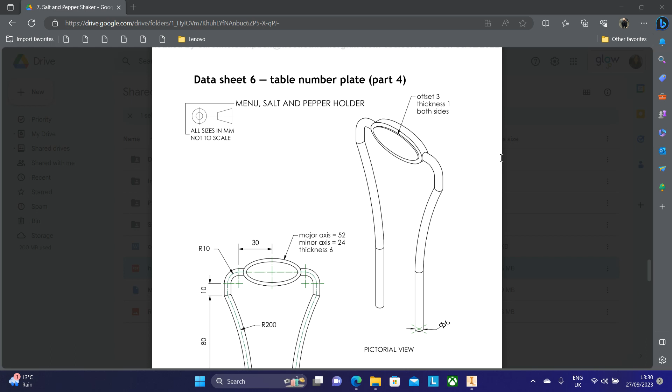So the number plate has this ellipse at the centre, and then we have these two paths running either side, which we will create by creating a profile and then creating a path and using sweep along a path. But we're going to start off with this ellipse in the middle.

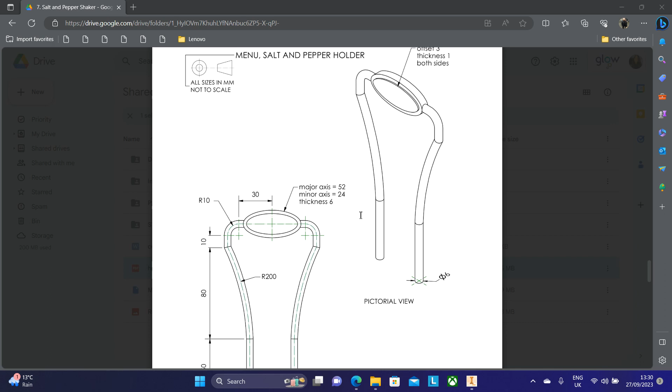So we can see that it has a major axis of 52 and a minor axis of 24, and then it has a thickness of 6. And then there is an offset of 3, which has a thickness of 1, and that is repeated on both sides. So the first thing we're going to do is open up Inventor, and we're going to make sure that we have a standard millimeter part.

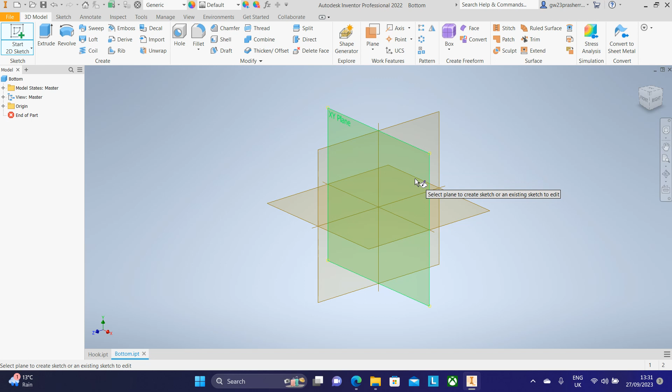We want to click Start a 2D Sketch, and we want to select the XY plane. Now under the circle category, we're going to press Ellipse, and we're going to start the ellipse off in the centre of our two axes on the green dot. We're just going to click to the side and above. Don't worry about the sizes just now.

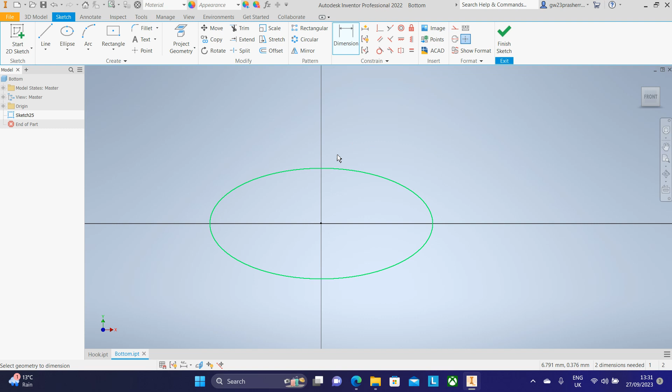Now we're going to use the dimension tool to dimension our ellipse. So I'm going to click the outside of my ellipse and I'm going to click above it and make sure that size is 26. And then I'm going to click the outside of my ellipse again, but this time select it to the right hand side, and I'm going to make that size 12.

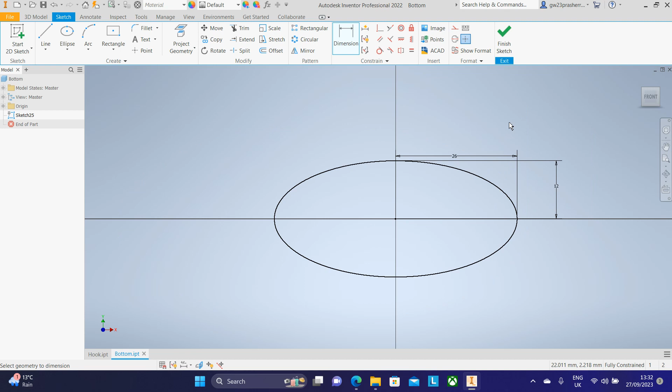Once I'm done, I'm going to finish the sketch and I'm going to extrude it by 6, like so.

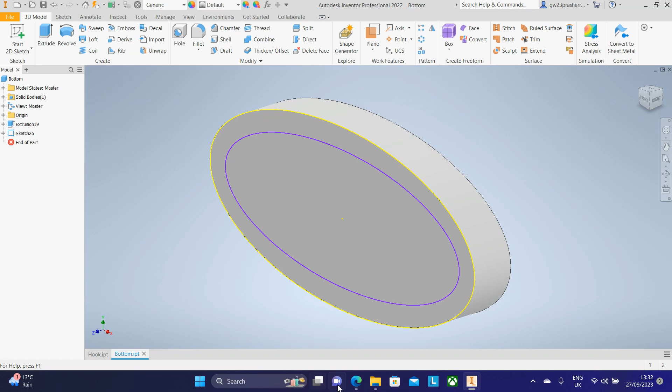Now we're going to do the kind of smaller ellipse in the middle. So I'm going to start a 2D sketch on one of the surfaces, and I'm going to project the geometry of the ellipse that I've already made. I'm then going to offset that by the 3 that it said on the pictorial view. So I'm going to offset it by 3 and press enter and then finish the sketch. And then I'm going to extrude that by 1. So click extrude and change the size to 1.

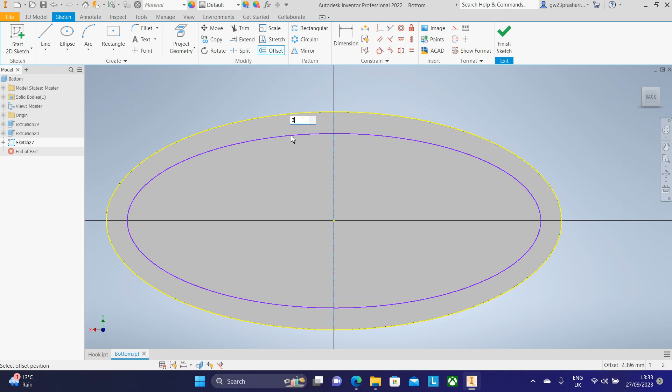And then I'm going to do the exact same on the back. So start a 2D sketch on the back, project the geometry of the ellipse, click offset, click the ellipse and change it to 3, and then finish the sketch and extrude it by 1.

So now we have our ellipse, and we're going to now start creating the sweep that is on either side of the ellipse. So the first thing we are going to do is to create the path.

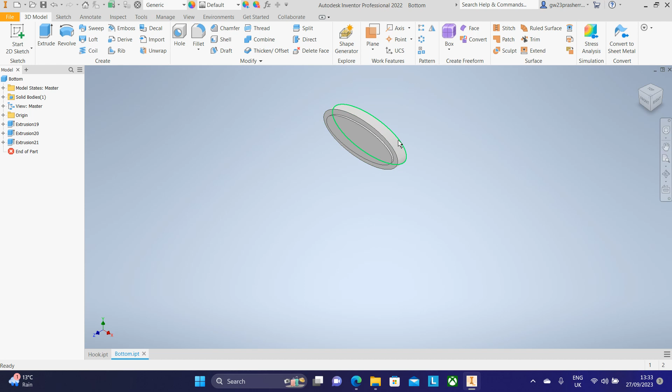So we're going to find a plane that runs down the middle of these ellipses. I'm going to go to the plane menu and I'm going to select the mid plane between two planes, and I'm going to select one side of the ellipse and then the other side. You can see that has now given me a centre plane.

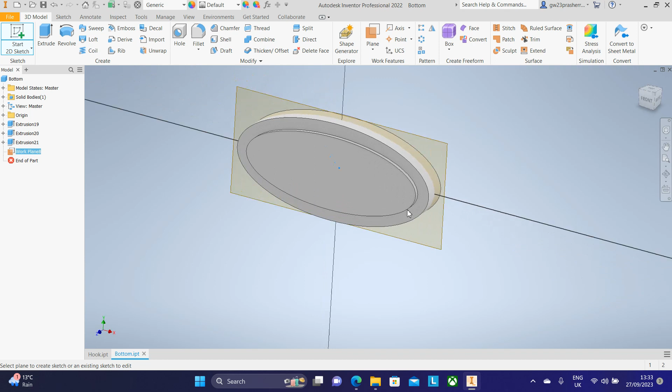So now I'm going to start a sketch on that plane, and I'm going to press F7 just so that it halves the shape and makes it a little bit easier to see.

So now, using the information on the datasheet, we are going to look at creating this shape. So if we go back, we can see that we're going to create this shape here. So we're going up 50, and then we've got a radius of 200, and then it goes up 10, and then we've got a radius of 10, and then it goes along 30.

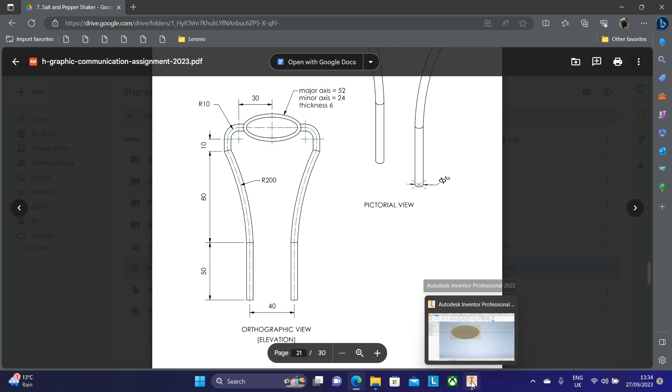So the first thing we're going to do is go along 30. So I'm going to take my line, I'm going to start at the centre of my ellipse, and I'm going to go along 30, like so.

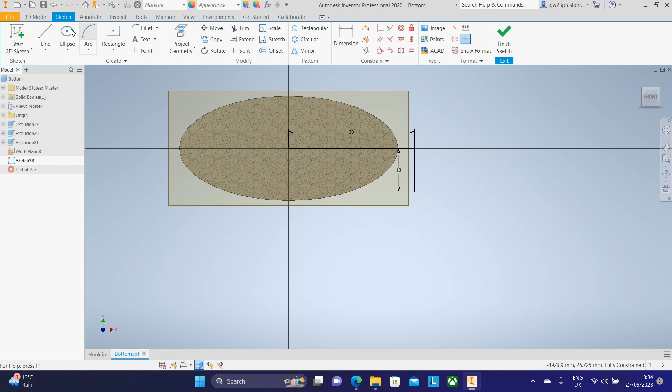Now where the 30 is, we have a radius of 10. So I'm going to go down from the end of my 30 line by 10, which will give me a centre point to use for a circle. I'm going to click the end of that 10 and then click the top of it, drawing a circle at 20.

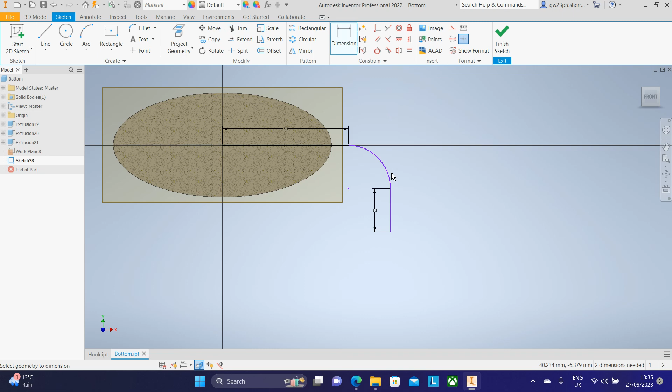Now we can go down a further 10. I'm going to use my line tool, and at the right hand side of my circle, go down another 10. Now I can delete my first 10 line and use trim to remove that part of the circle. So I've now got my line at 30, then a curve at 10, and then another line at 10, like so.

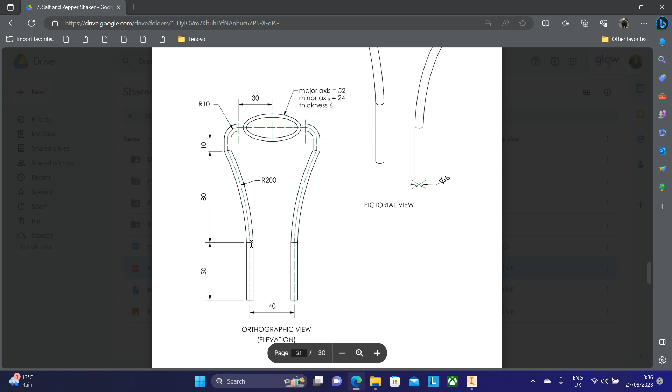Next, we need to work out the arc so that we can go from this point here and get a second point so that we can do our arc at 200. What we know is that the height of the arc is 80 before it touches the 50 line, and that this point for the arc is 20 away from the centre.

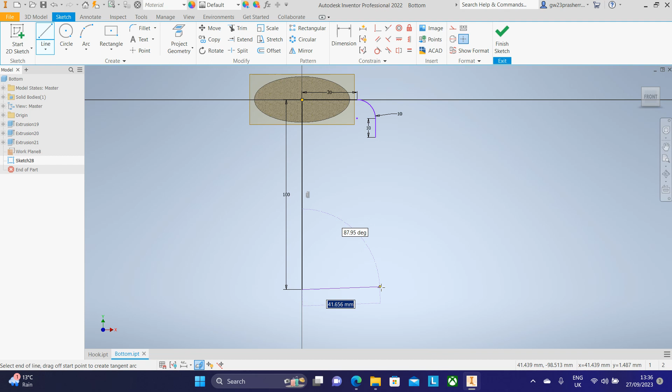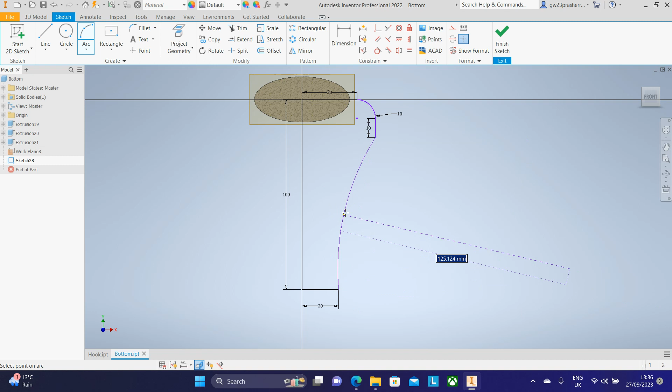First, I'm going to get an overall height, so I'll draw my line at 100, going from the centre of my ellipse. Then I'm going to go out to the side 20, from my 100 line. This now gives us two points for my arc. I can go to the bottom of my 10 line and the side of my 20 line, and make that arc 200, like so.

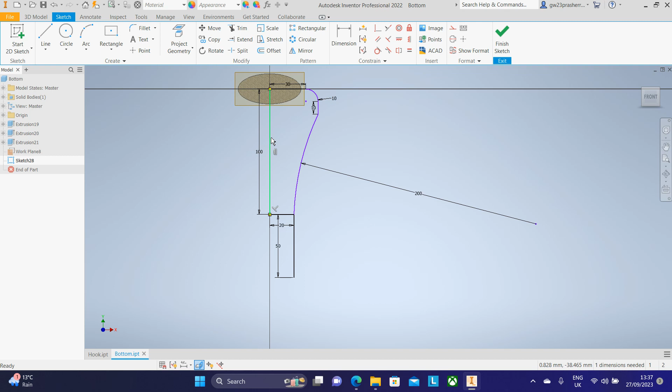That just leaves us to do the little line at 50 at the bottom. So again, I'm going back to line, and where the end of my arc is, I'm going to go straight down 50. Now, in order for the sweep to work, we're going to make sure we delete the 100 line and the little 20 line, so we've only got the path that we can see. Once that's done, we're going to finish the sketch.

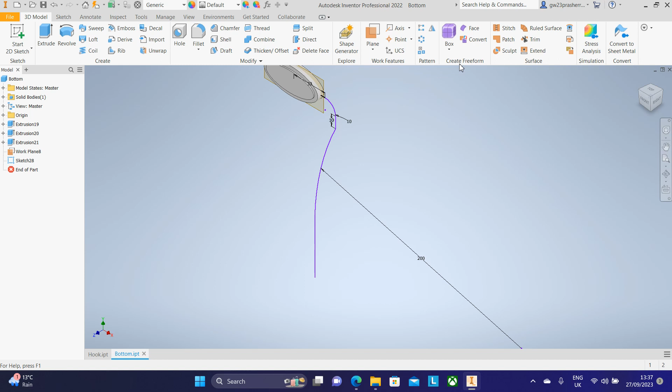Next, we need to draw the profile for the sweep. We're going to turn on a perpendicular plane and draw our circle at 6. I'm going to click plane, click that little edge of our 50 line, and then start a sketch on that plane, making sure I've got a circle at 6, like so.

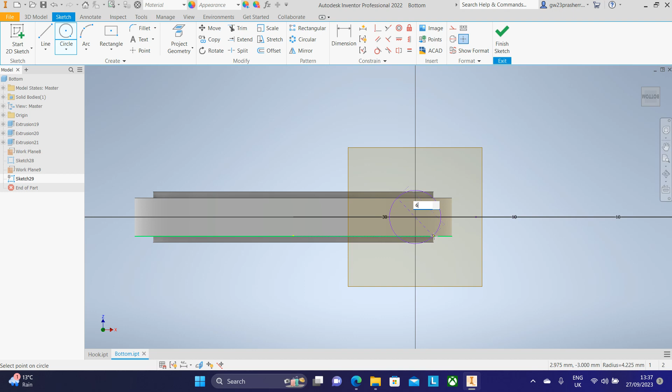I am then going to use sweep to sweep that profile, click path, select the path, and press OK. And you can see that that has swept across.

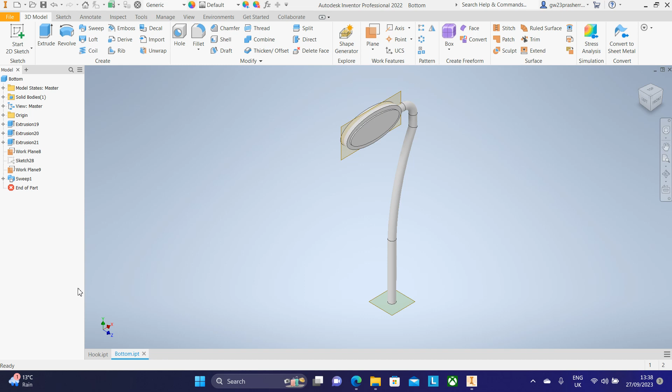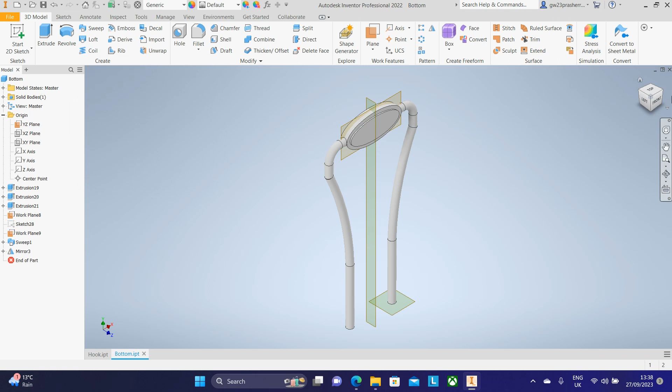Now we could draw another path and profile on the other side, but to save time, we can use mirror instead. I'm going to find a plane that runs down the centre of my ellipse — in this case, the YZ plane — and turn that visibility on. I'm then going to press mirror, select my path, select my mirror plane to be that centre, and press OK. You can see that has now repeated it on the other side.

Once we've done that, we're just going to turn off the visibility of all planes that are still there, like so. And that is the menu holder now completed.